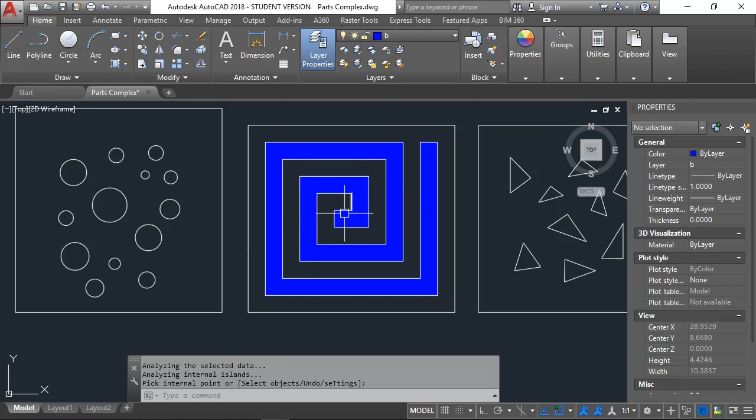Whenever you send this file to the plasma cutter, it automatically figures out what is the outline of the object and what parts are going to be cut out from the inside. To help you see that, we use our hatch command like we did before - I'll click on the solid hatch, and right now it shows that this part in blue is going to be cut out, and the part that's in black here is actually going to be left of the metal.

I'm going to go ahead and erase that, and the thing I want to show you is let's actually start out with the P-lines first - it'll help us out with the kerf lesson. Right now, whenever I click on these lines, they are all individual lines.

What has to happen whenever we send this to the plasma cutter is every time it sees an individual line, the tip of the plasma cutter drops down to the correct height, it goes across, it cuts that line out, it raises the tip, and then it drops back down and starts another line.

There's a couple different problems with that. The first problem is it takes a tremendous amount of time. The second problem is that tip won't start firing unless it has metal underneath it.

Whenever you cut across here and you get to this point, you just blew away the metal in that corner. So whenever it drops down again to start cutting here, there's no metal for it to start with. There's going to be a little bit, and it might work, but it's not going to work well, and usually you're going to have a part that doesn't end up cutting out everything you want cut out.

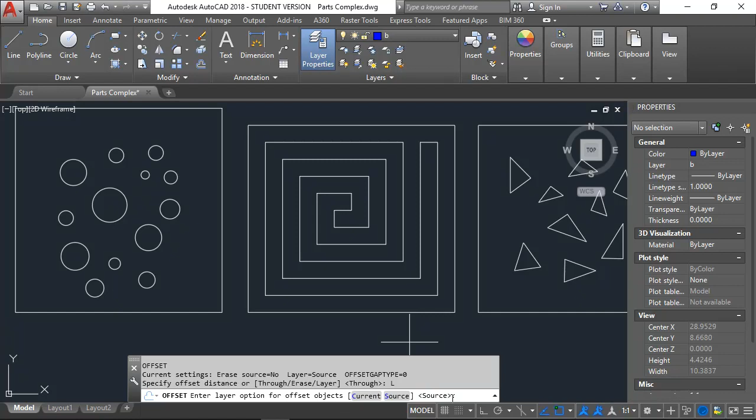Right now this layer is probably like a layer 0 or something. I'm going to click layer, and let's see if I can change this to B, which is a blue layer. Or let's pick current - that'll set it to this blue. After that's set, anything that I offset is going to be on the layer B, the current layer.

So I'm going to pick an offset distance. I want to use an offset distance of 1/2 of an 1/8, so I can offset on each side of the line. So 1/2 of an 1/8 is a 1/16, or 0.0625 in decimal form. That's my offset distance.

And now it asks me to select the object to offset. So I'm going to try this. I'm going to pick this line, and I'm going to offset inward, and I'm going to offset outward.

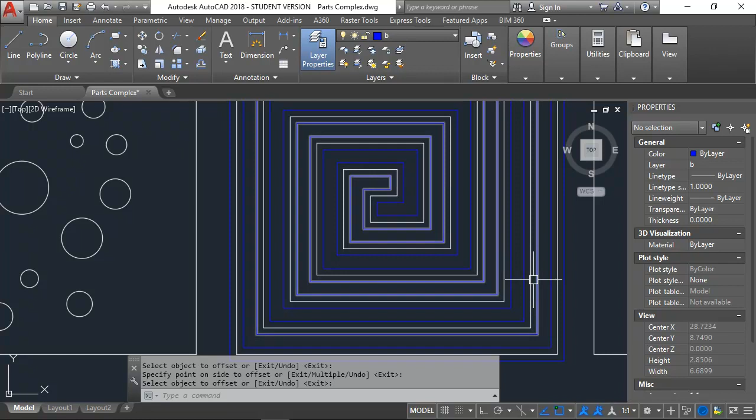And I'm going to do the same thing for the outside line. So basically what's going on here, whenever you look at this object, if I turn off my white layer using the layoff command, now the part that's going to be left is in here, and it's really hard to see with all these different things going on. So I'm going to use my hatch to make it stand out.

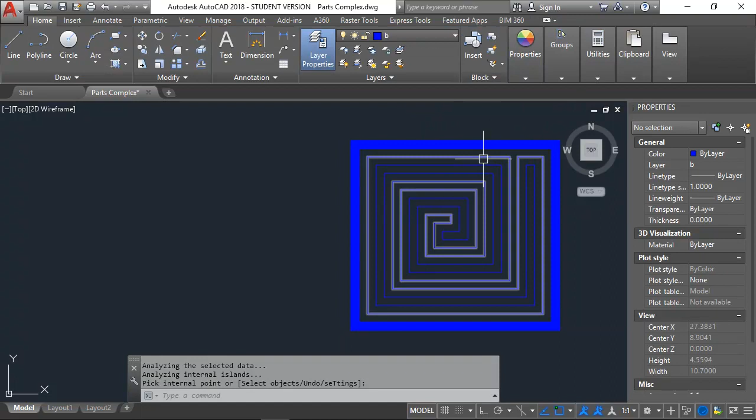So now you can see the objects or parts that are hatched in blue are going to be cut out of the metal, and the parts in black are what's going to be left. So the whole thing you need to understand is the parts that are left are a lot smaller than what they were, because there's a lot of material removed.

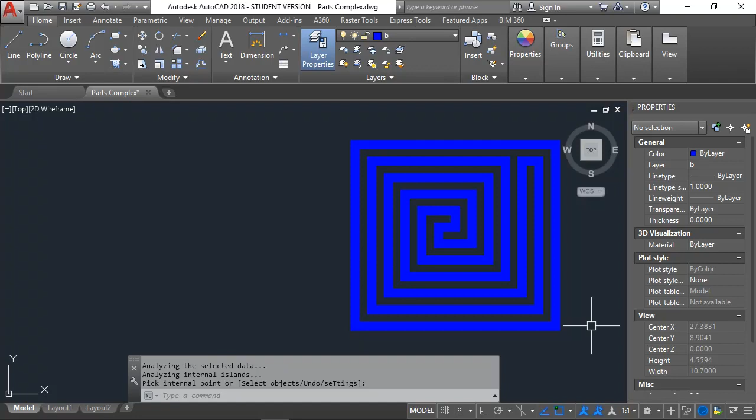So you have to take that into consideration. If you have two lines that are very close together, an 1/8 inch apart, whenever you actually cut those two lines out, you're not going to have any metal left. So you need to make sure your lines are at least an 1/8 inch, probably better a 1/4 inch apart at the very least, so you have at least an 1/8 inch of metal left when you're done cutting. That's just a real quick example, and we can figure out what the kerf is for different material thicknesses and different tips.

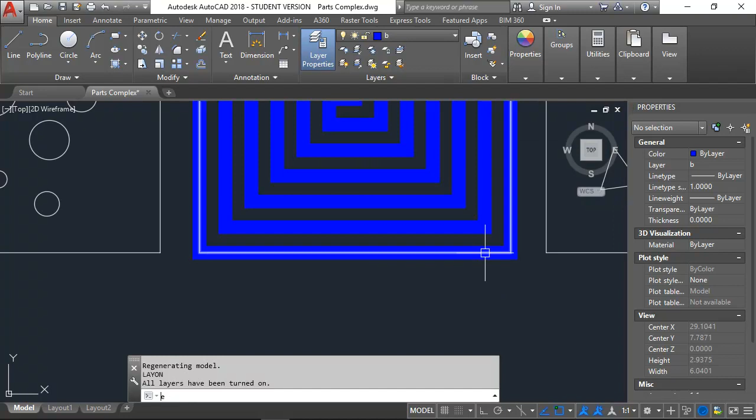I'm going to go ahead and use my layon command, turn all my layers back on, and undo this to the point where I have everything back. And I'm going to erase these lines that I used for kerf, so I can actually use these files for plasma cutting.

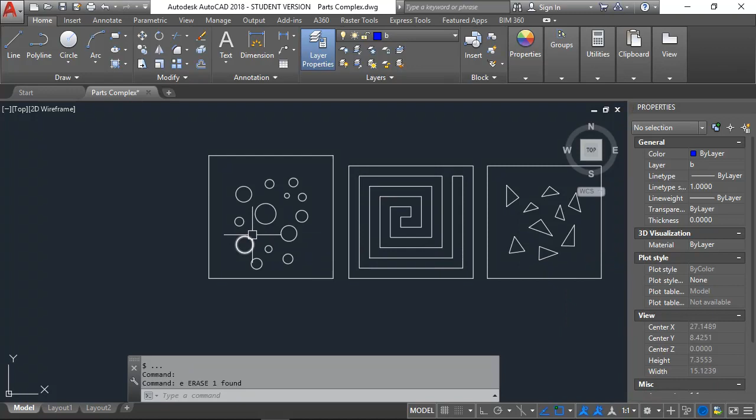So the next thing is looking at small details, small lines, small movements of the tip of the plasma cutter. Whenever I have something very small like this, if I list this, it tells me the radius is 0.0599, or 0.06. That's pretty small. So if I double that, my diameter is close to 0.12.

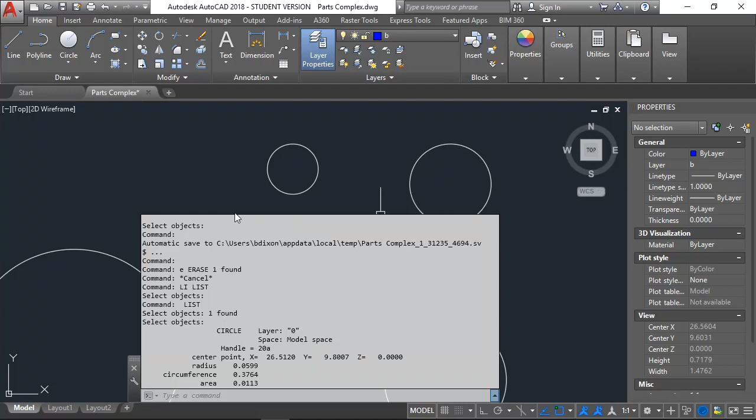So the diameter is around 1/8 of an inch. 1/8 of an inch isn't very big. Now you are going to get a little bit bigger object because of the kerf, but it's going to be hard to get all these small little lines. So if I had these triangles that I made, and I expected it to do all this detail work, with a whole bunch of these little triangles all over the place,

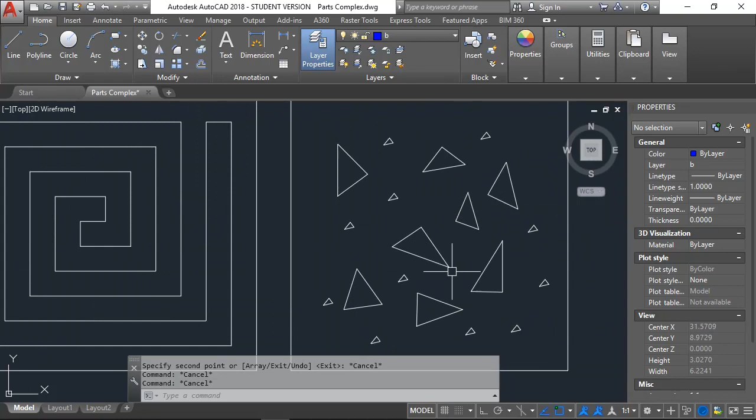the plasma cutter really isn't the tool to do work like this. If you're going to do something this precise and this small, you're really going to have to move up to a laser, which is probably 10 times the cost. So what we need to do is not have all that detail, and we need to have smaller increments.

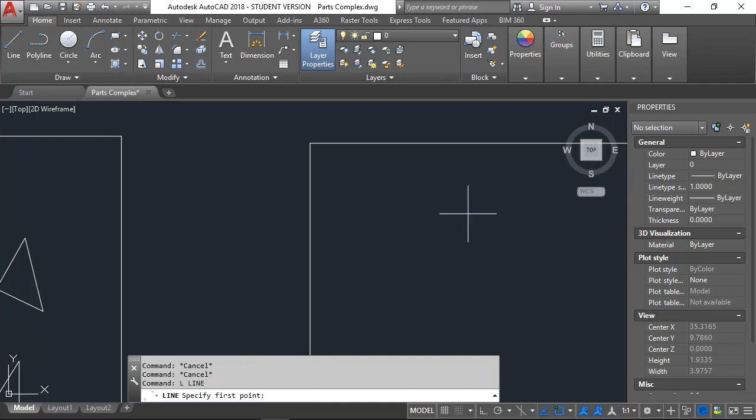So the next part of this is, let's say I had an object where I brought an image in and was tracing it. Let me switch layers so we can see this - I have all these little tiny itty bitty lines, turn my snap off, all these little tiny things that make up my object.

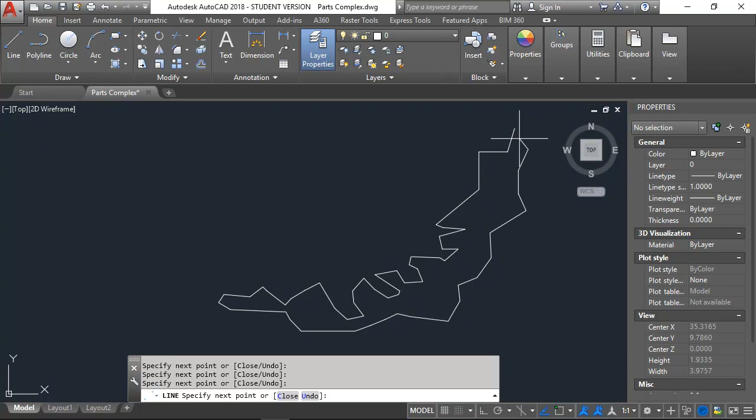I'm going to run into a lot of problems with that, so I need to have bigger segments. I need to have smoother objects. I can't expect the plasma to do this level of detail. It's really just something you have to play around with a little bit.

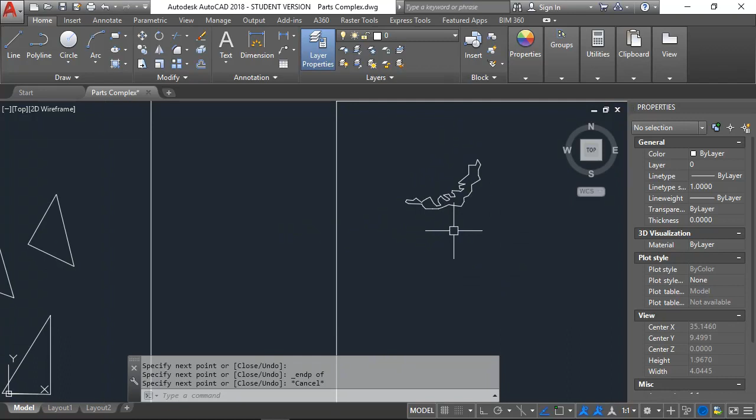All right, the last thing we're going to talk about - these are pretty much ready to go. So to get to the plasma cutter, it's really going to depend on the software running the plasma cutter, the controller. Back in the old days, a DXF file was what you pretty much had to use anytime you were transferring information from AutoCAD to another program. Now we have a lot more options - a lot will accept a DWG.

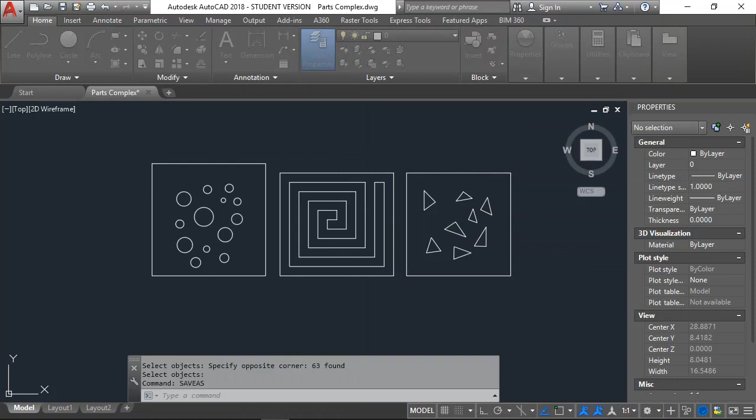So whenever I do save as, my screen pops up with Cube of Doom here - let me get this box a little bit smaller so we can see it. So whenever I come in here to do a save as, I could save it as DWG and try that out, and if it works, great. If I can't use that with my plasma cutter controller, I'm going to have to come in here to files of type and choose a DXF file. I would say that's guaranteed to work.

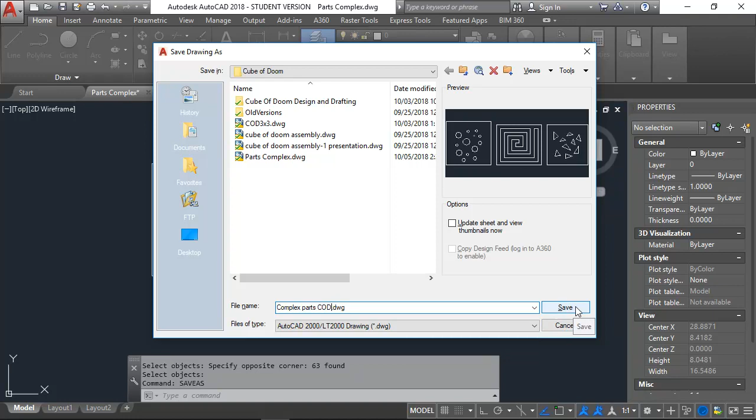So after everything's done, like I said, I'm going to start out with a DWG and see if that works - I know our plasma cutter does work for DWG. And I'm going to save this as - let's change the name of it, call it something different - Complex parts for COD, the Cube of Doom. I save it, and I'm going to put this on a flash drive and take it over to the plasma controller and load it into the plasma software.